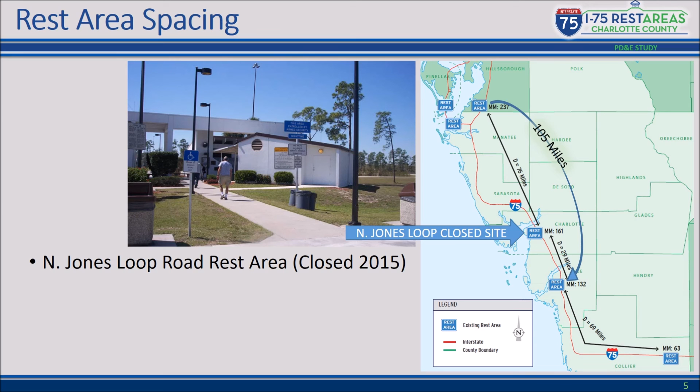The purpose of FDOT rest areas on the interstate is to provide safe rest stops for the motoring public. Rest areas provide comfort and convenience with restrooms, parking, and vending machines adjacent to the interstate. Rest areas enhance safety by providing a safe place for motorists to stop, reducing driver fatigue. Rest areas can also provide staging areas for emergency response following disasters such as hurricanes.

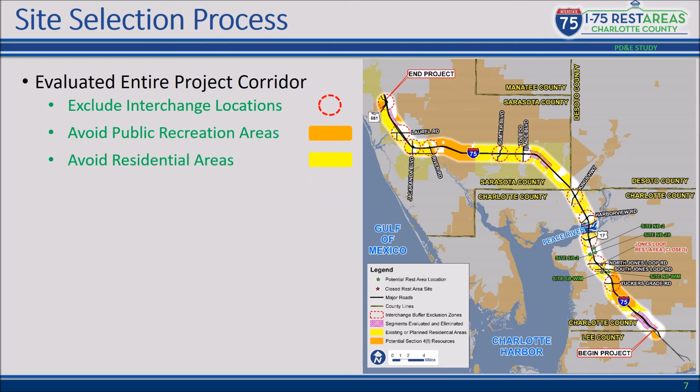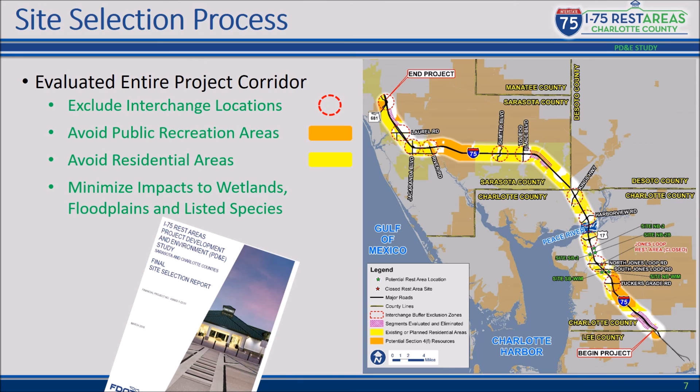Early in this project's development phase, the department evaluated the entire project corridor to evaluate potential rest area locations. Due to engineering constraints, no new rest areas were evaluated within a 1-mile buffer surrounding existing interchange areas. Areas that included public recreational lands and residential areas were also excluded from further consideration. The corridor and viable sites were screened to minimize impacts to wetlands, floodplains, and listed species habitat. In March of 2016, the department produced a site selection report, which found viable locations for rest areas. This site selection report is available at tonight's hearing.

At a public information meeting held on August 2, 2016, we asked for your input on 5 viable alternatives, as well as the no-build alternative. The project team presented the viable rest area build alternatives to the Charlotte County Board of County Commissioners on October 11, 2016. The project team also presented the same material to the Charlotte County Punta Gorda Metropolitan Planning Organization on October 24, 2016. Based on comments received and additional environmental and engineering analysis, we selected the preferred build alternatives of NB2B and SB2. Both of these sites are improved pasture, located south of the Airport Road overpass in Charlotte County.

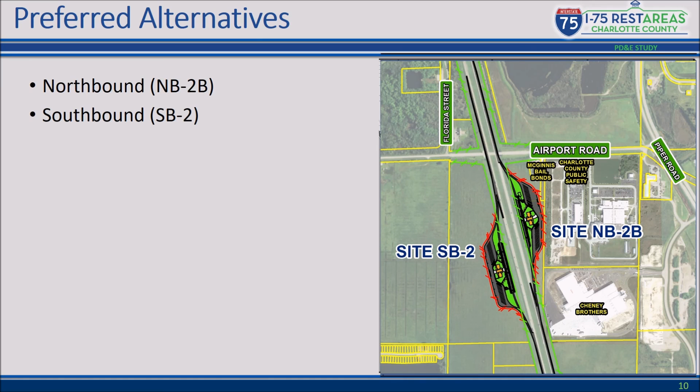The preferred northbound site, alternative NB2B, is located on the east side of I-75, just south of the Airport Road overpass. This alternative develops an auxiliary lane north of North Jones Loop Road. This lane becomes a single exit-only ramp to the rest area. This single-lane ramp then separates into 2 single-lane ramps. One ramp is for cars and the other ramp is for trucks, trailers, and RVs.

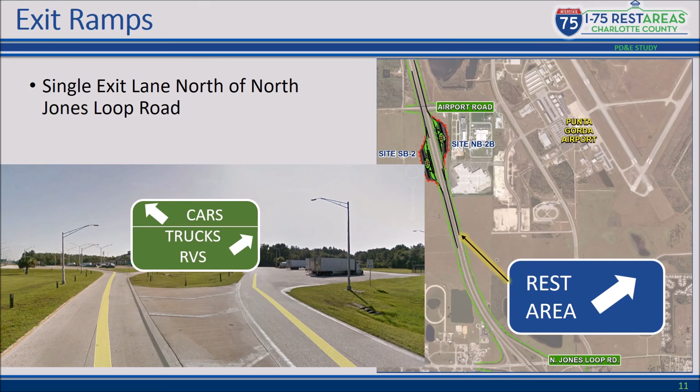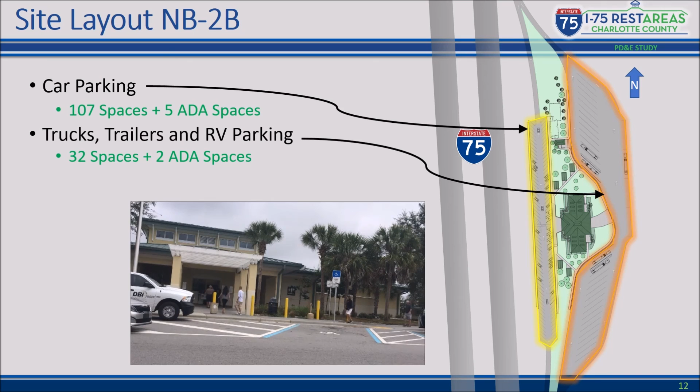Parking for cars is located between I-75 and the rest area building. Parking for trucks, trailers, and RVs is located behind the rest area building. The parking lot for the cars has 107 spaces and 5 ADA accessible spaces. The parking lot for the trucks, trailers, and RVs has 32 spaces and 2 ADA accessible spaces.

Upon leaving the rest area, the 2 ramps leading from the separate parking areas converge into a single-lane entrance ramp to I-75. Other than the ramps, no changes to I-75 are required to construct these rest areas. The total right-of-way impact for alternative NB2B is approximately 14.4 acres.

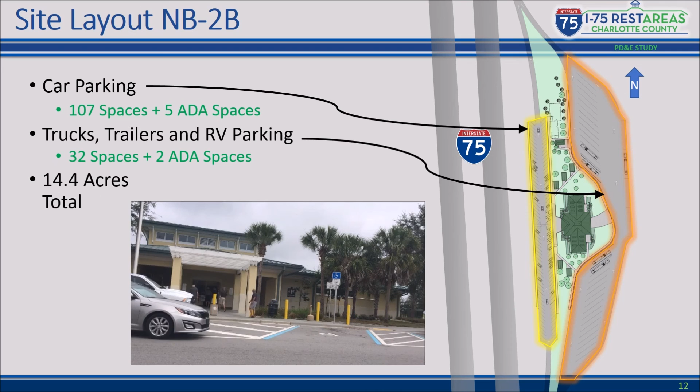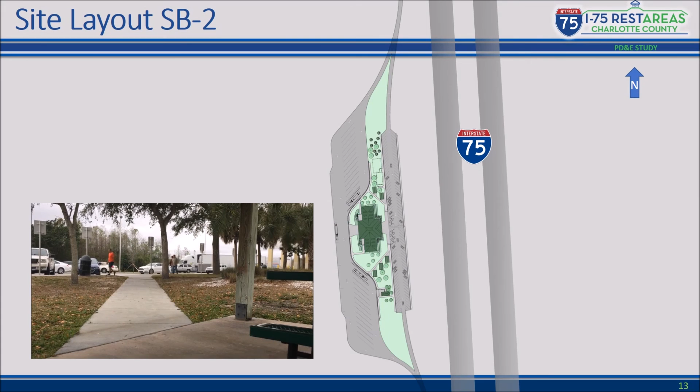The preferred southbound alternative, alternative SB2, is located on the west side of I-75, just south of the Airport Road overpass. This site also consists of open improved pasture. The ramps and parking arrangements are similar to the northbound site. The total right-of-way impact for alternative SB2 is approximately 17.5 acres.

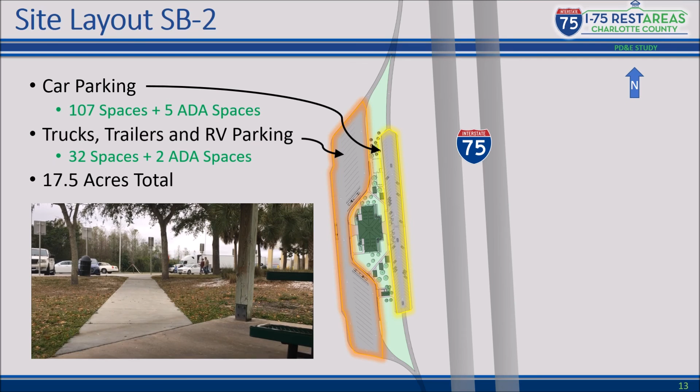The right-of-way estimates for both sites include the areas for site, ponds, and floodplain compensation areas. No residential or business relocations are anticipated with either of the preferred alternatives. As both of the build alternatives will require right-of-way, the FDOT will implement the right-of-way and relocation assistance program in accordance with Florida Statute 339.09 and the Uniform Relocation Assistance and Real Property Acquisition Policies Act of 1970.

Brochures that describe the right-of-way acquisition process are available at tonight's hearing. FDOT right-of-way representatives are also available this evening to assist you and discuss the program. The no-build alternative is also an option and will remain a viable alternative throughout this PD&E study. The no-build alternative assumes no new rest areas would be constructed in this segment of I-75.

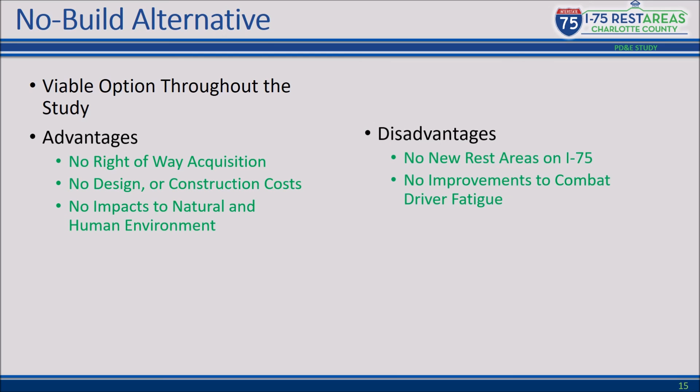The advantages of the no-build alternative include no right-of-way, design, or construction costs. The no-build alternative also has no impacts to the natural and human environments. Disadvantages of the no-build alternative include a lengthy gap in rest area facilities and no improvements to combat driver fatigue. The PD&E study evaluated potential environmental effects associated with the preferred build alternatives.

As this project is located adjacent to I-75's limited access right-of-way, it is not expected to cause land use changes of adjacent properties. Threatened and endangered species are afforded special protection under the Endangered Species Act of 1973 and Florida statutes. A number of protected wildlife species, including wading birds and wood storks, occur in the vicinity of the recommended alternative. The eastern indigo snake may also occur in the project area. Impacts to these species are expected to be minimal. Special provisions required by the U.S. Fish and Wildlife Service would be implemented to protect these species during construction.

In accordance with Executive Order 11990, Protection of Wetlands, the project team evaluated the project for wetlands involvement. No impacts to natural wetland areas are anticipated. However, the proposed project may impact other surface waters and roadside swales. All reasonable measures to avoid or minimize impacts to wetlands were considered during development of the design concept. Construction techniques that minimize potential wetland impacts will also be recommended. Although not anticipated, if required by regulatory agencies, mitigation meeting Florida statutes and United States Code will be proposed to offset unavoidable impacts.

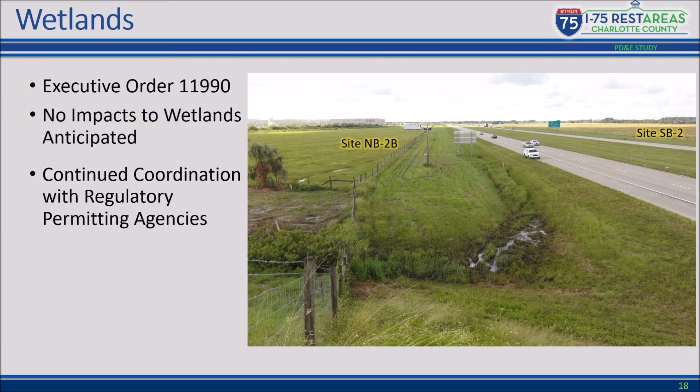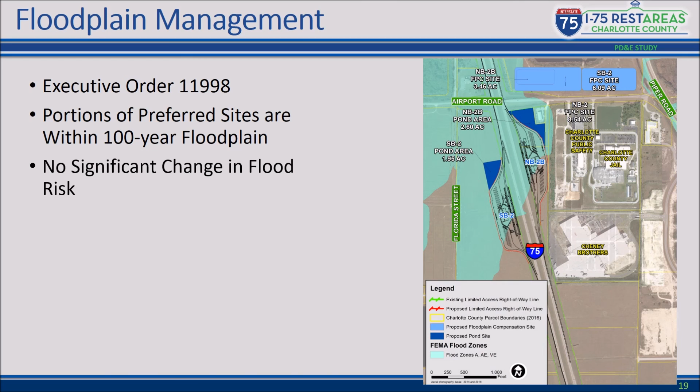In accordance with Executive Order 11988, Floodplain Management, the study team evaluated the project for potential floodplain involvement. Even though portions of the preferred alternatives are located within the 100-year floodplain, there is no significant change in flood risk. Potential impacts to the 100-year floodplain will be evaluated and permitted with the Southwest Florida Water Management District during the design phase, and floodplain compensation may be provided if required.

A water quality impact evaluation was conducted. The proposed stormwater treatment design will include measures to assure that no significant effect to water quality would result from construction of the preferred alternatives. The design will comply with all water quality requirements of the Southwest Florida Water Management District.

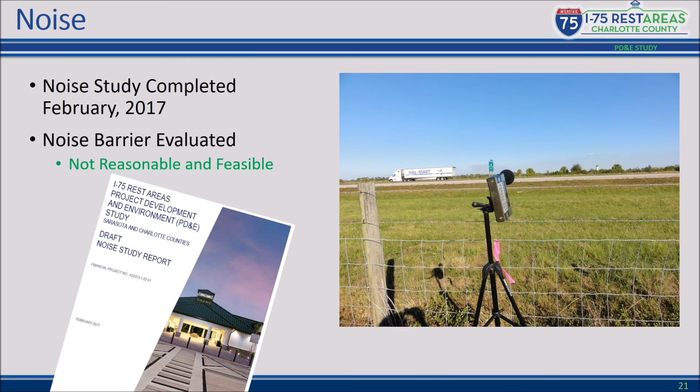A noise study was conducted in accordance with the Federal Highway Administration's approved procedures to evaluate potential noise impacts associated with the preferred alternatives. Noise-sensitive sites along the project area are predicted to experience design-year traffic noise levels that approach or exceed noise abatement criteria. A noise barrier was evaluated for one impacted site, but was not found to be a reasonable and feasible abatement measure. If you'd like more information regarding traffic noise, please speak with staff at the Noise Information Table. An air quality assessment was conducted to determine potential impacts resulting from the proposed improvements.

The project is located in an area currently designated as being in attainment under the Clean Air Act. Therefore, demonstration of conformity with the state implementation plan is not required for this project. Construction of the proposed project may cause minor short-term air quality effects, like dust from earthwork and smoke from open burning. These effects will be minimal, and the department will adhere to all state regulations.

A Level 1 contamination screening was conducted to evaluate potential contamination for the preferred alternatives. The analysis determined that the preferred alternatives do not have any potential environmental risks due to contamination, and no further action is planned.

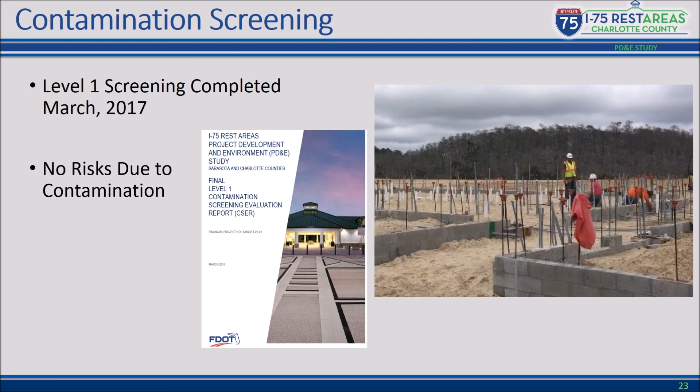A cultural resources assessment was conducted in accordance with the National Historic Preservation Act of 1966 and Florida statutes. As a result of the assessment, it was determined that the survey area had a low potential for the discovery of archaeological sites. Based on this data, development of the I-75 rest areas will have no effect on any archaeological sites or historic resources, which are listed, determined eligible, or considered potentially eligible for listing in the National Register of Historic Places.

Public parks, recreation areas, wildlife and waterfowl refuges, and historic sites are afforded special protection by the federal government under Section 4(f) of the U.S. Department of Transportation Act of 1966 as amended. There are no potentially eligible Section 4(f) resources in the vicinity of the preferred alternatives.

There is an evaluation matrix on display and included in your handout that shows a detailed comparison of the preferred build alternatives and the no-build alternative. The matrix shows potential effects to the social and natural environments as well as cultural resources. It also identifies preliminary costs. Site alternatives SB2 and NB2B are the least expensive southbound and northbound sites evaluated.

The combined estimated costs for both of the preferred sites include: design costs are estimated at $2.6 million. Right-of-way acquisition costs are estimated at $5.6 million. And construction costs are estimated at $25.9 million. The total estimated costs for both preferred sites is $36.7 million.

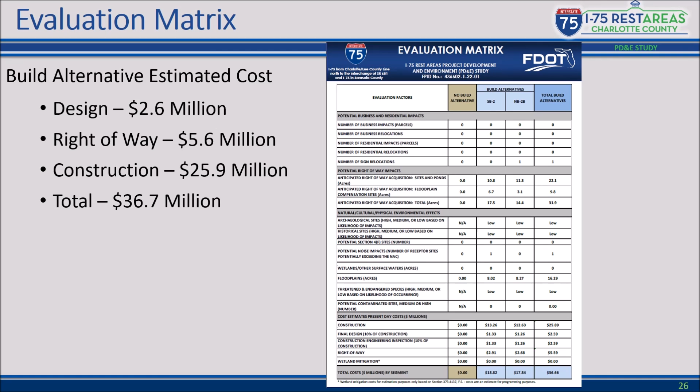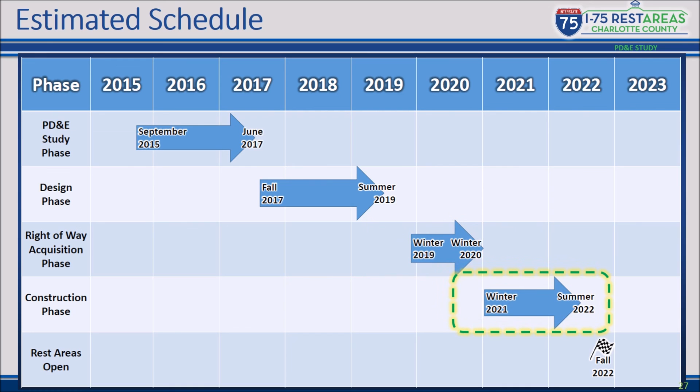The design phase is fully funded, and a consultant will be selected later this spring. Future phases of this project are contingent on FDOT's acceptance of the recommended alternative. The right-of-way acquisition phase is funded and is anticipated to begin in fiscal year 2020. The construction phase is also funded and is anticipated to begin after fiscal year 2020.

The Florida Department of Transportation would like your comments on the preferred alternatives as well as the no-build alternative. In a few minutes, you'll have the opportunity to provide oral comments that will be transcribed by a court reporter. Also, you can submit written comments in the comment boxes this evening, or send them to FDOT's project manager, Stephen Andrews, later via U.S. mail or email. Please submit your comments by May 2nd, 2017, so we can complete our study documentation.

Comments will be evaluated and, where feasible, may be incorporated into the conceptual design. The final determination will be submitted to FDOT's Office of Environmental Management for approval expected this summer. This public hearing was advertised and held consistent with federal and state requirements, and is conducted consistent with the Americans with Disabilities Act of 1990.

This hearing also fulfills the requirements of Executive Order 11988 pertaining to floodplain management and Executive Order 11990 pertaining to protection of wetlands, whereas the opportunity for public review and comment is offered for projects in wetlands and floodplains.

The environmental review, consultation, and other actions required by applicable federal environmental laws for this project are being or have been carried out by the FDOT pursuant to 23 United States Code 327 and a Memorandum of Understanding dated December 14, 2016, and executed by the Federal Highway Administration and FDOT.